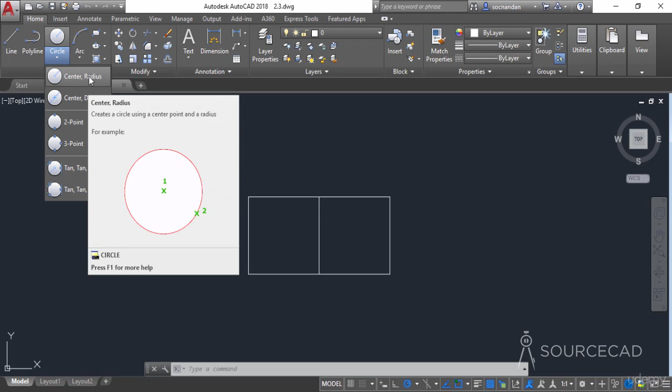The most basic method of making a circle is the center radius. To select the command, you can click on this center radius option, or use its command equivalent, circle or C. After starting the command, click at the point from where you want to start the circle. In this case, we want to start it from the midpoint of this rectangular geometry, so I'll click there and this will be the center of our circle. Now look at the command line, which prompts you to specify the radius. Let's enter the radius as 1 unit and press enter. Now here we have it, the circle with a radius of 1 unit, or a diameter of 2 units, at the center of this line.

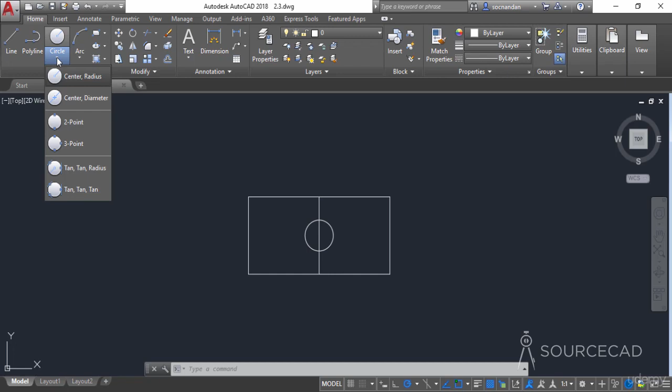Now let's look at another method of making the circle. Go to the circle flyout and select center diameter. In this case we need to specify the center first, and when you look at the command line, you'll notice this option has been overridden, and now it says we need to specify the diameter of the circle. Let's type 3 as the diameter and press enter, and now here we have it, the circle with a diameter of 3 units, or a radius of 1.5 units.

You can also start the diameter option from the center radius command. Click on center radius, then click at this point or any other point to start the circle. Now you can click on this diameter option on the command line to switch to diameter, and simply enter the diameter value. Let's enter 4 as the diameter and press enter, and here we have it, the circle with a diameter of 4 units, or a radius of 2 units.

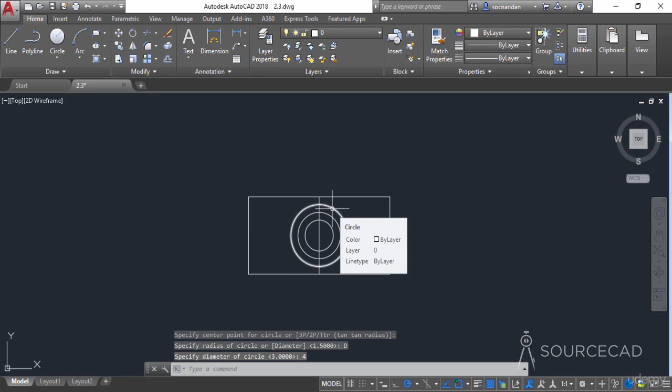Let's now erase all of these circles and look at the remaining options. The next option is a 2-point circle. What if we want to make a circle that connects 2 points, for example the endpoints of this line? I'll click on this point and then click on this point, and here we have the circle, with this line acting as the diameter.

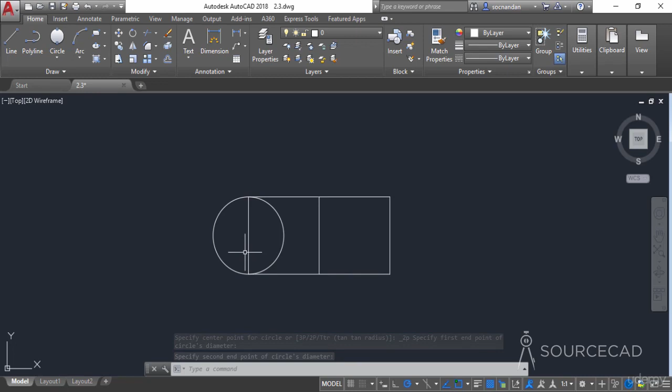Now let's click on the flyout again and select 3-point. In this case we need to specify 3 different points. I'll select the first point here, then the second point, and now this point, which is the midpoint of this line. I'll click on this point, and here we have it, the circle on 3 different points. This circle passes through these 3 points, and its radius is decided based on the geometry, or the points on which we click.

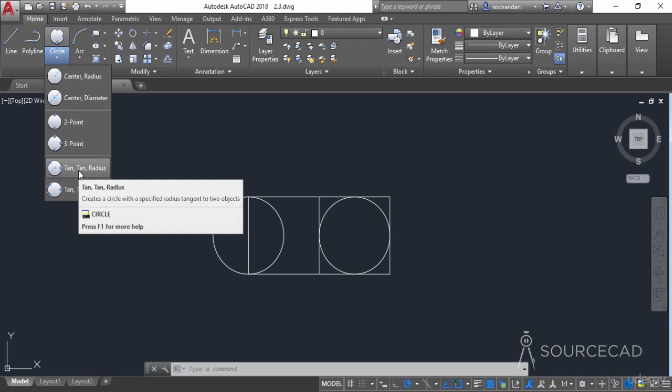Now let's look at the remaining options. We have one more option here, which is tangent tangent radius. I'll select tangent radius, and now let's select any geometry for the first tangent point. Click on this circle, then click on this line. Now the circle will be tangent on this circle and on this line, and we need to enter the radius appropriate for this geometry. I'll enter 2 and press enter, and now you'll notice this circle is tangent on the other circle and also on this line, with a radius of 2 units.

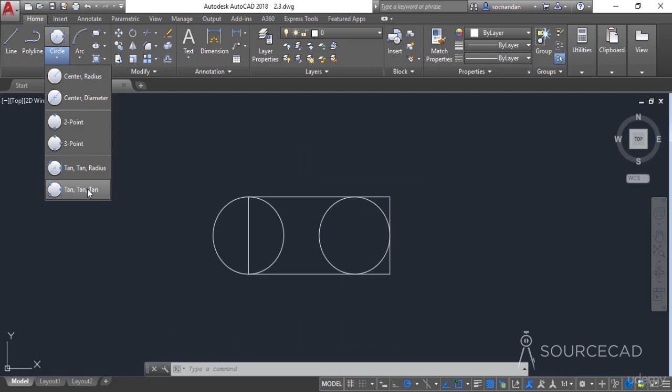Now what if we want to make a geometry that's tangent on 3 different geometries? For that, I'll first erase these 2 geometries, and now we'll make a single circle which is tangent on this line and on these 2 circles. I'll select the last option, which is tangent tangent tangent. Now click on the first circle, the line, and the second circle, and here we have it, this circle is tangent on both circles and also on this line. So these are the different ways of making a circle in AutoCAD.